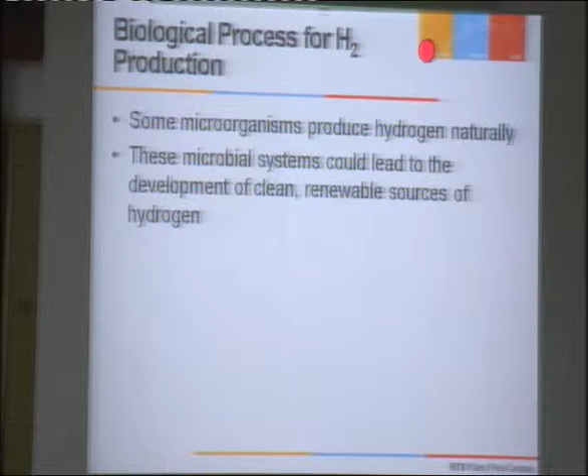You can utilize microorganisms to produce whatever material you want to produce. Here we have different types of microorganisms which can produce hydrogen naturally through natural processes. The only problem with biological hydrogen production is the low yield.

Biological hydrogen production processes are becoming important mainly because they can utilize renewable energy resources. They are usually operated at ambient temperature, while gasification or pyrolysis require high temperature. They require less energy and are less expensive. However, the major constraint to commercialization of these processes is the lower hydrogen yield and lower rate of hydrogen production.

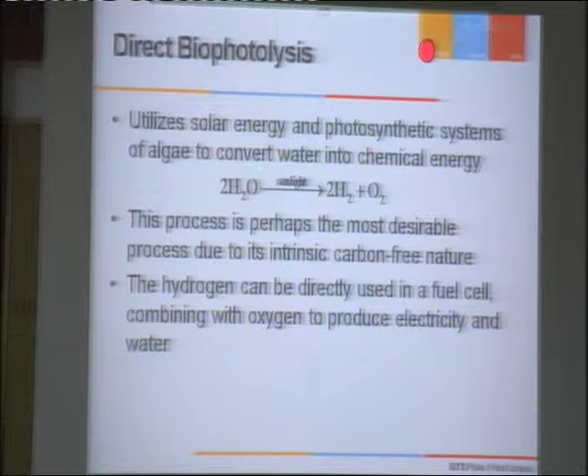So there are 5 processes. In all these processes, there are 2 enzymes which mainly play a role: hydrogenase and nitrogenase enzyme, whether it is direct biophotolysis or indirect biophotolysis.

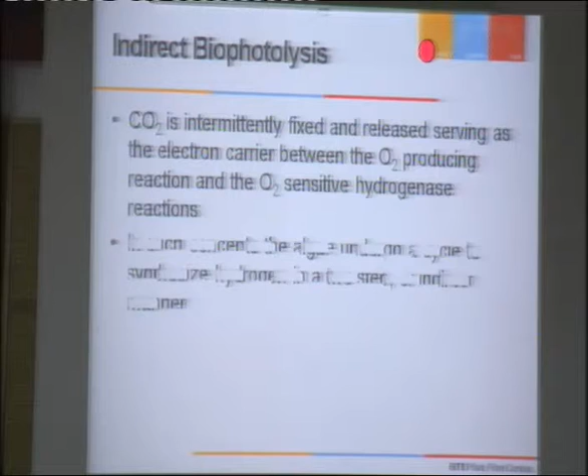In direct biophotolysis, it utilizes solar energy and the photosynthetic system of algae to convert water into chemical energy, so the water is split into hydrogen and oxygen. There is a mechanism where H2O is first converted to 2 hydrogen plus ions and electrons, and then the enzyme utilizes those 2 electrons to combine 2 atoms of hydrogen into the form of hydrogen, H2.

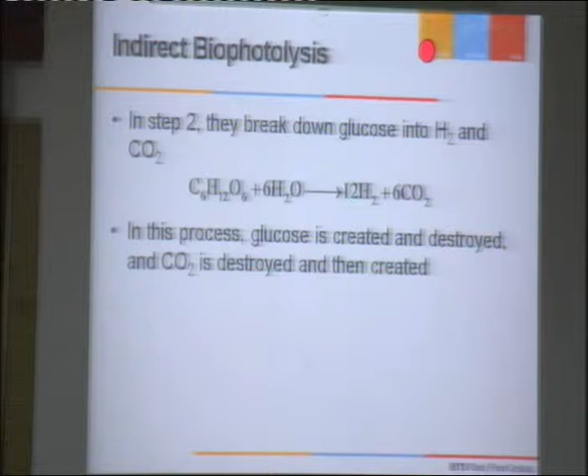Similarly, in indirect biophotolysis, in step 1 the cyanobacteria, again an algae, assemble water and CO2 into glucose and oxygen through a complex process by photosynthesis. So first it forms glucose, and then in a second reaction it is further converted into 12 molecules of hydrogen. So it breaks down.

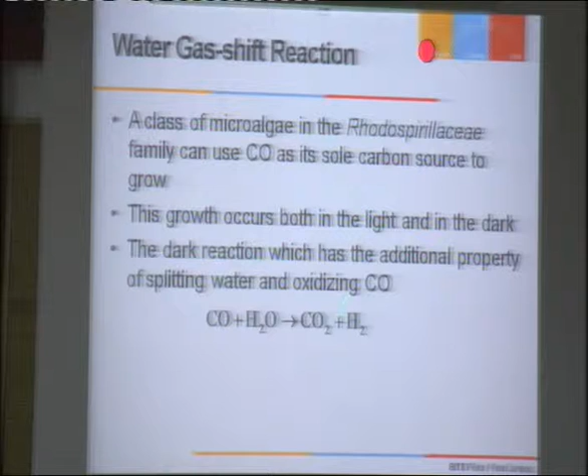Third is the water gas shift reaction. This is based on specific microorganisms that can utilize CO as their sole carbon source to grow, because CO also has carbon, and every species requires a carbon source for growth. This growth occurs both in light and in dark. In the dark reaction, there is the additional property of splitting water and oxidizing CO. So it is further oxidized by the microorganisms, that is CO plus H2O, which produces hydrogen.

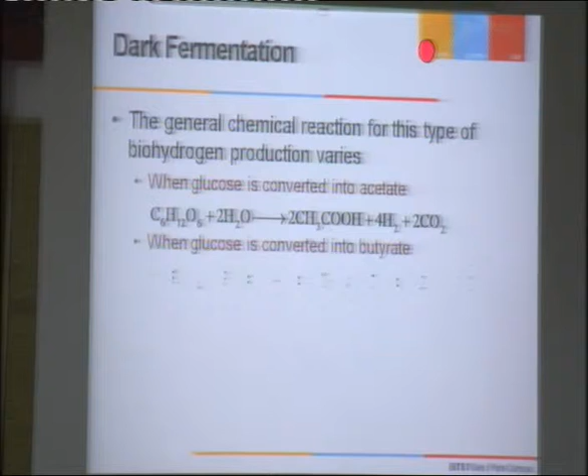In photofermentation and dark fermentation, again a similar reaction occurs, but there are different microbial species responsible for those reactions. So as I mentioned, mostly the mechanism is the same, because of the 2 enzymes present in either the algae or the microorganisms, hydrogenase and nitrogenase, but only the reaction paths are different.

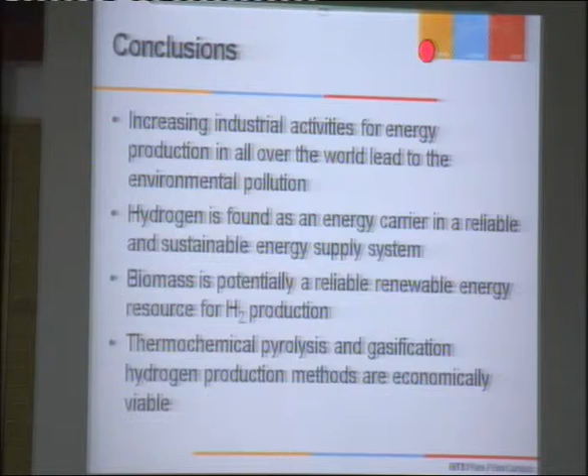So this is what I have, and now I will come directly to the conclusions. The increasing industrial activities for energy production all over the world lead to environmental pollution, as you have seen, there is solid waste. Hydrogen is found to be an energy carrier in a reliable and sustainable energy supply system, and biomass has the potential to be a reliable renewable energy resource for hydrogen production. The thermochemical pyrolysis and gasification hydrogen production methods are economically viable. However, now biological hydrogen production is also being taken up, because everybody is working on environmentally friendly systems. So these are also coming in a big way, and the only problem, which is the low yield, may be sorted out later.

Here are some references. Thank you.

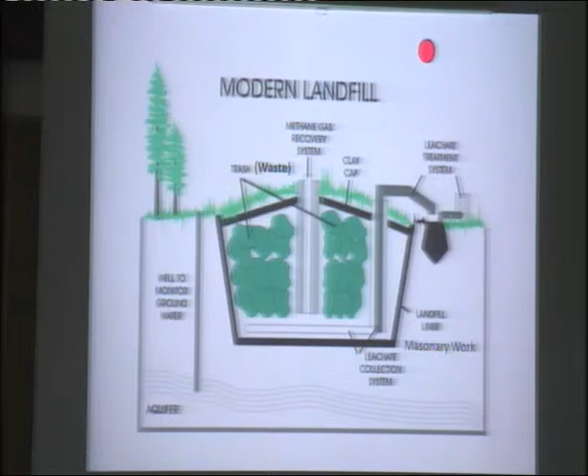The waste, that is trash, is kept in the masonry work inside, and the gas formed is taken out for production of energy, and the leachate is collected and treated, okay. So the disadvantages you have already seen just now, people are not affected by those things.

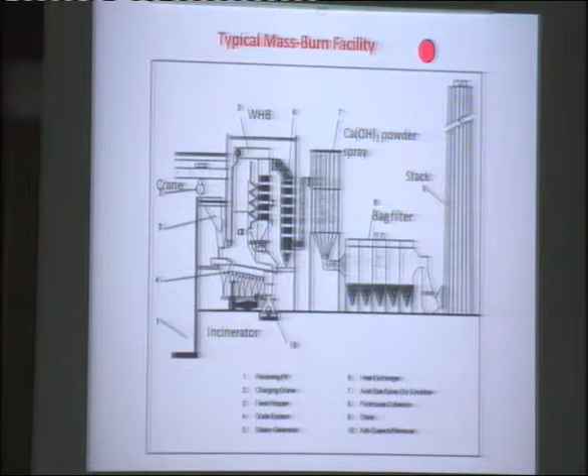Here is a typical mass burning facility. You will have waste which must be dried to the required moisture content, otherwise it's very difficult to burn. You will have a crane to put it into the incinerator. The high temperature gas generated will be utilized for generation of steam, which will be utilized for power production in a steam generator. But when you burn the fuel, you will have a lot of ashes, so the gas is to be treated properly for removal of dust particles before it goes to the atmosphere.

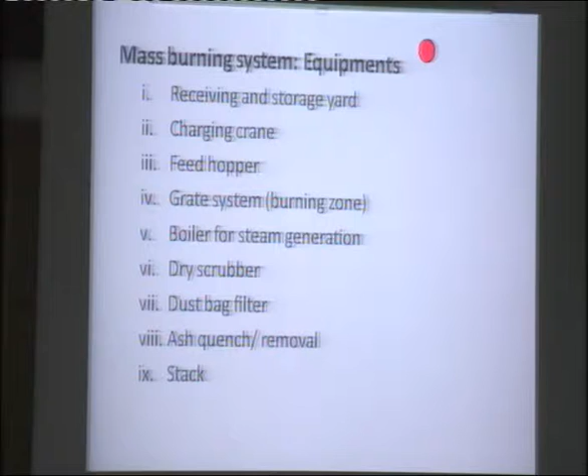That's a typical system, some figures have been taken from reference sources. You will have different equipment in this type of mass burning system: storage yard, charging crane, feed hopper, grate system for burning, boiler for steam generation, scrubber for treating the acid gas, and dust bag filter, ash quench removal. The very high temperature ash cannot be sent for landfilling directly, and the gas needs to go through treatment.

In many cases, you will have refuse derived fuel. When you have municipal waste, it is to be pelletized in the form of pellets. Or when you use gasification or pyrolysis, that will be used for plastic solid waste or tire waste. So I am not going to talk only about kitchen waste or something like that. We should also talk about plastic waste, which can be utilized more economically, and tire waste also.

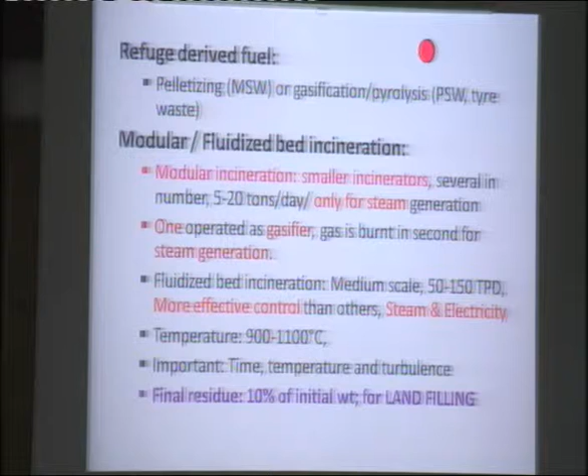It's modular, skid-based incineration. There are many incinerators built in very small units, only 5 to 20 tons per day, used only for steam generation, because that steam it is not economical to produce electricity from. So only steam can be generated. Under that condition, one unit is operated as gasifier. The gas produced is burned for the second, and the steam is produced, and that steam can be utilized for different purposes, which we will come to a little later. It can be utilized in different industries.

As you know, paper and cloth need to be dried using a drum dryer. Steam is fed into the drum, and over the drum, the cloth or paper passes over and gets dried. The temperature is generally 900 to 1100 degrees centigrade, and the residue obtained from these incinerators is generally not more than 10%. This residue is to be sent to landfill.

Benefits derived from incinerators: you can get steam which can be utilized for food processing and drying purposes, for textile, leather, pulp and paper industries also. Electricity can be sent to the local grid. But the concern is the emission of gaseous and particulate pollutants, which is to be cleaned properly, and leaching from contaminated soil and groundwater.

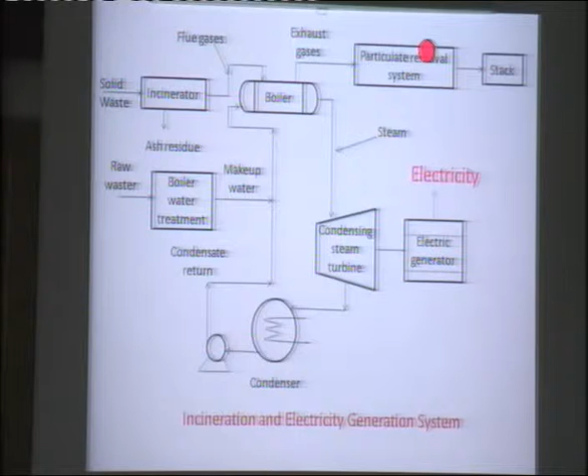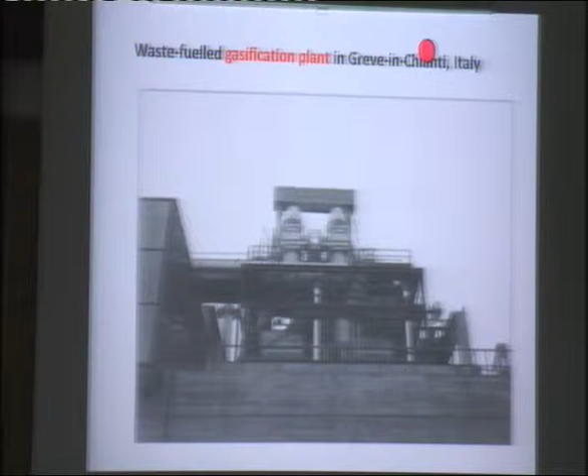This is a typical flow diagram of an incineration and electricity generation system. You will always have a solid waste incinerator. You will get the flue gas, and that flue gas temperature is very high, 900 to 1100 degrees centigrade. That can be used for generation of high pressure steam, which is used for generation of electricity through a steam turbine.

The gas will go to the particulate removal system and then to the stack. You can see this boiler water, which is very costly, does not need any further treatment. It will go directly to the boiler for further steam production, but you need to give always some quantity of make-up water because of losses.

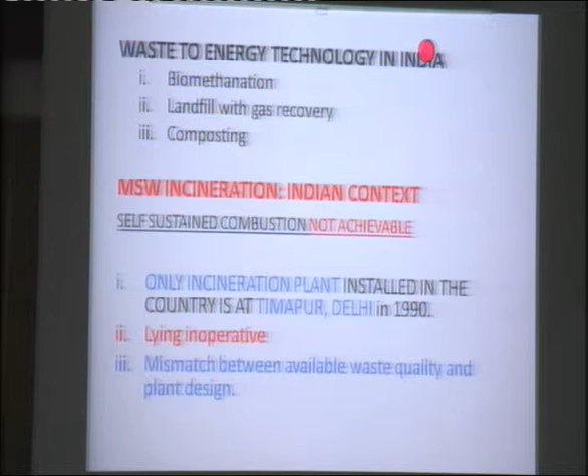Say, a waste-fuelled gasification plant. If you go to such a plant, you cannot see anything from outside, but whatever I told just now in the previous slides, everything will be there inside.

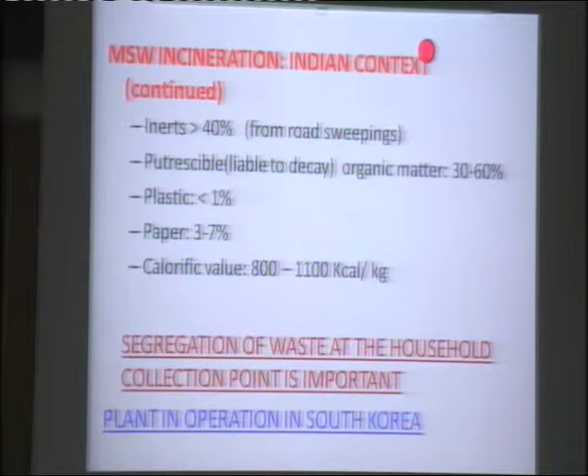Waste to energy technology in India, as I was talking about, generally includes biomethanation, landfill with gas recovery, and composting. These are the practices in India. But for MSW, there is no incineration plant in India because whatever waste is obtained is not self-burning, since it contains a lot of sweepings and such things put into the dustbin, so it contains incombustibles that cannot be burned. There was one plant built in 1990 in Timarpur near Delhi, which is not operating because under the conditions it was built, the company did not get the quality of material, the waste, for burning. It did not burn properly, so it is not running.

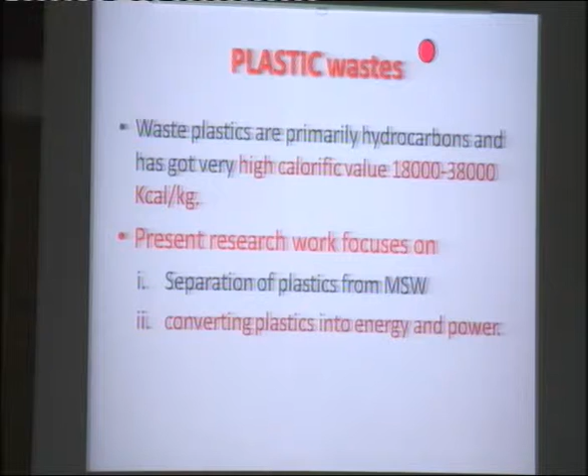In the Indian context, municipal solid waste contains more than 40% inerts, organic matter 30 to 60%, plastics less than 1%, paper 3 to 7%, and calorific value 800 to 1100 kilocalories per kg. Under this condition, this cannot be burned, so that plant is not running. It is very important that segregation of waste at the household collection point must be done, otherwise it will be mixed with non-combustibles and cannot be utilized for generation of power or energy.

Now, there are many plants in operation. For example, a few days back, I was observing a plant in South Korea. They are producing energy.

Now, plastic wastes - plastics can be separated from the municipal waste and we can get energy or power from that. You can see the calorific value is too high, 18,000 to 38,000 kilocalories per kg. Present research work focuses on separation of plastics from municipal solid waste and converting plastics into energy and power.

This energy can be in the form of chemicals. As the previous speaker was talking about, plastics can be converted to different types of chemicals, and that can be utilized as blending of motor fuels.

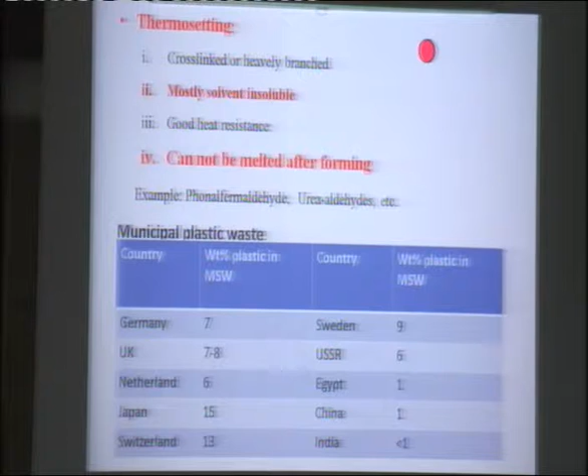Here you can see that 4% of the oil is utilized for production of plastics, and 3 to 4% of energy is utilized for its processing purposes. So around 8% of petroleum is utilized for production of plastics. It will be proper economical if we can convert that plastic back to fuels.

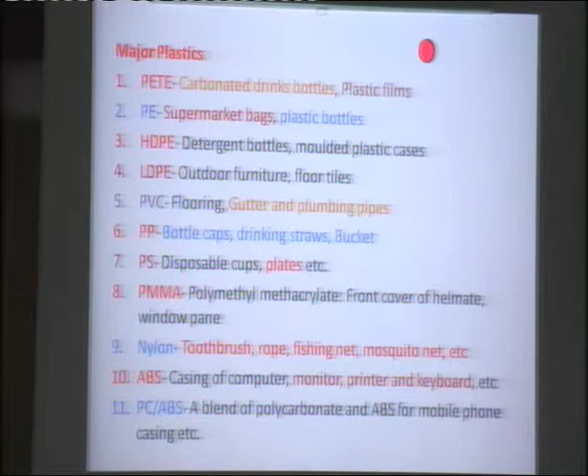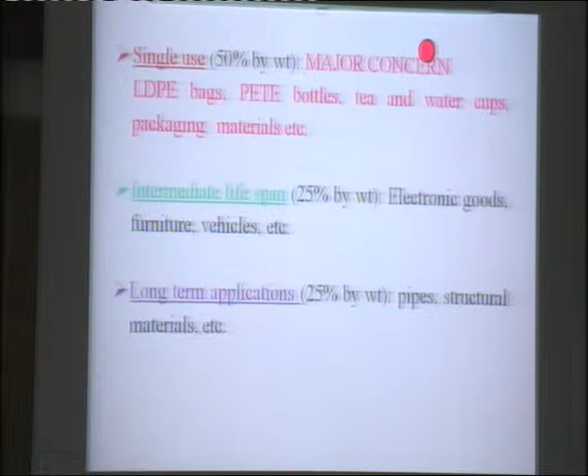Now there are different types of plastics. We have thermoplastics. These thermoplastics can be completely melted and new products can be formed. For example, polyethylene, polypropylene - all these things can be melted or dissolved and reprecipitated, and we can have new products.

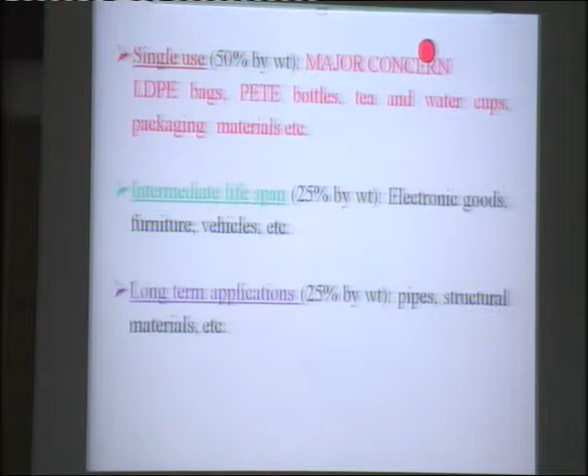But thermosettings - you can see the phenol formaldehyde, urea-aldehydes - you get cups, plates, plastic plates and such things. They cannot be melted and reformed.

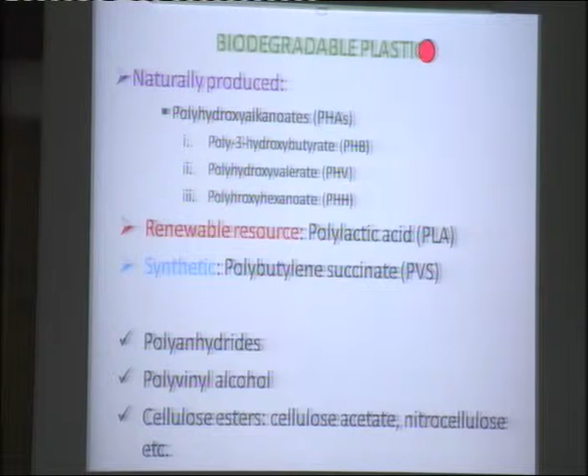But some of these, like nylon 6, contain nitrogen, and PVC contains chlorine. PVC cannot be gasified with polyethylene or polypropylene, because when you treat PVC, you get hydrogen chloride, which is corrosive and gives different types of products that create different types of problems.

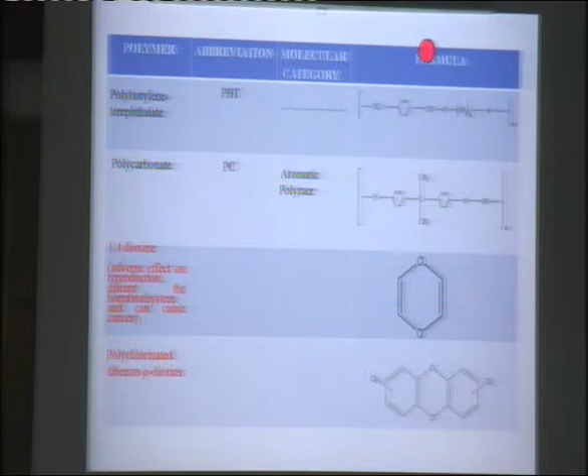So before you go for incineration or gasification, you have to separate these. You see this dioxin - chlorine or oxygen can form dioxin, which is very much toxic and can cause cancer and different types of diseases. So these are to be separated before burning. Open burning is not advisable.

Now you have different types of recycling systems - primary, secondary, tertiary, and quaternary recycling systems. Primary is used in industries - new plastics, small plastic scrap generated during processing can be recycled within the plant itself. That is called primary. In mechanical recycling, you have to separate all the plastics.

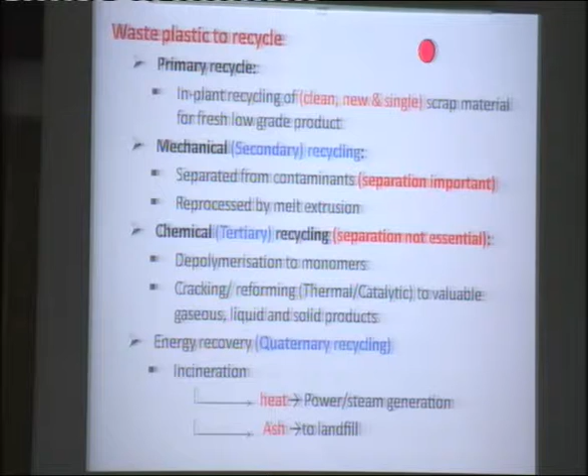Then you can produce different products separately. In tertiary recycling, you need not separate them - you can process them combined, through cracking and reforming, and get different types of fuels. But this separation is very difficult, so mechanical recycling is too costly. Nowadays more stress is being given to tertiary recycling, converting these plastics to chemicals.

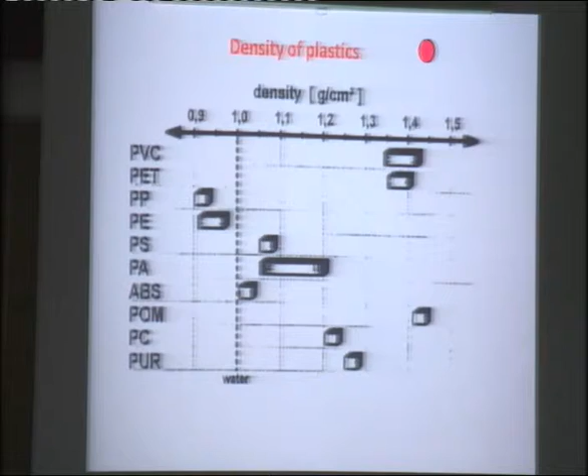Then you have energy recovery through incineration, which is not advisable because of pollution and other problems. Ultimately, you need to go for landfilling the ash, which will create soil, water, and other pollutions. Now you have to understand the different methods of separating plastics.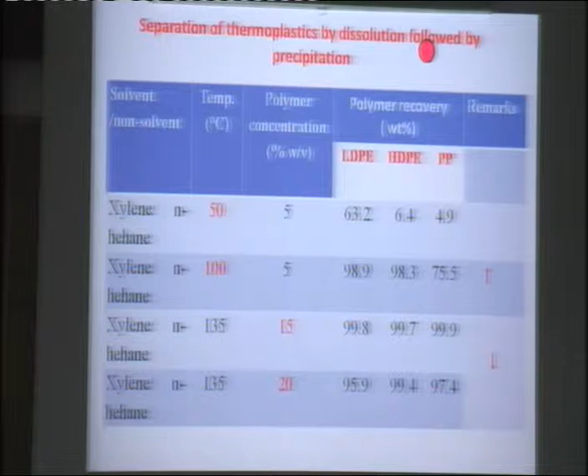You first dissolve, for example polypropylene and polyethylene, in xylene, then put that solution into normal hexane. The polyethylene will separate - it can be separated, dried, and you can again form some other product which is of low cost.

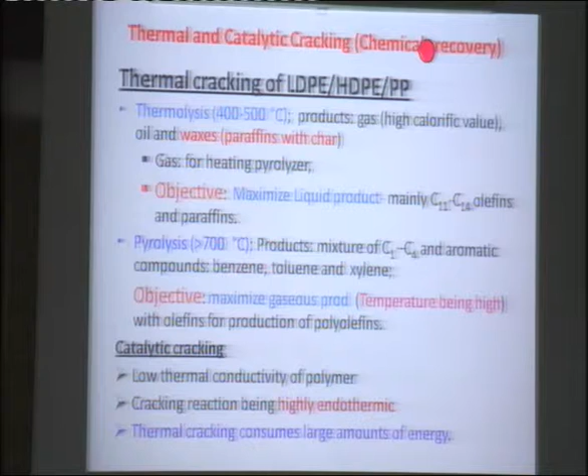As I told, PVC should not be used for incineration along with polyethylene or polypropylene, because it produces hydrogen chloride, which is highly corrosive and forms different types of toxic products.

Now this is thermal cracking. If you crack thermally, either by thermal cracking or catalytic cracking, you will get different types of products - fuels.

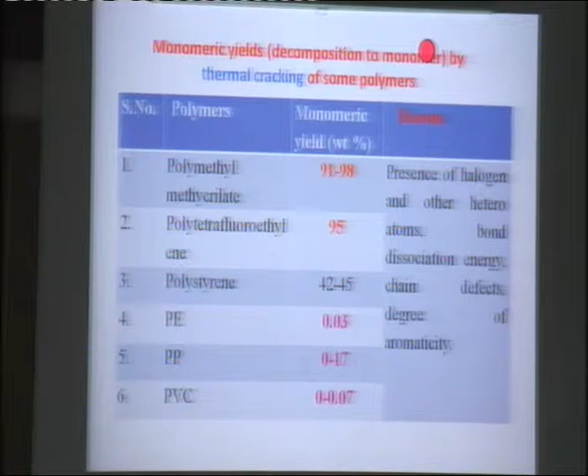But if you use catalyst, you can reduce the temperature gradually, because cracking is always a highly endothermic process. So you want to extract energy from these plastics, but because it is an endothermic process, you need to supply energy for cracking purposes. That is the reason that if you use catalyst, you get several advantages. The cracking will occur at lower temperature, the rate will be high, and you will get the desired product if you use the specific catalyst.

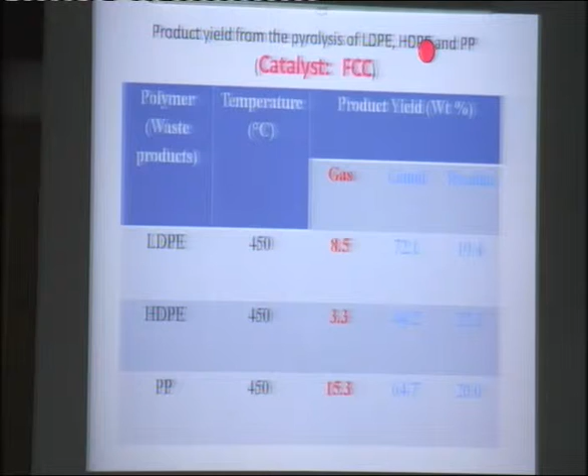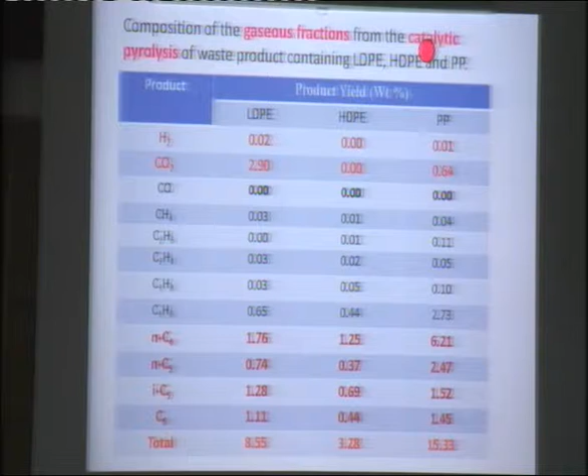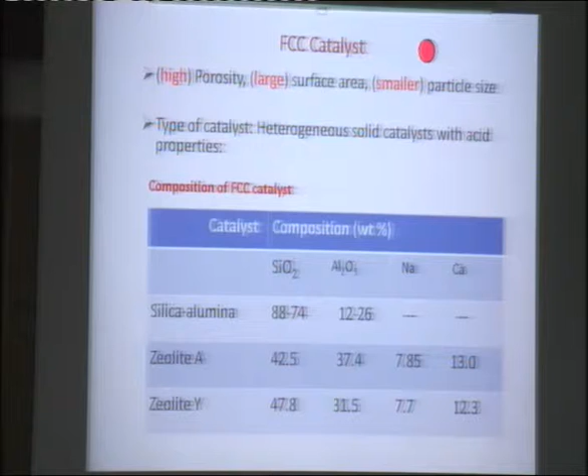These are the things I was talking about. Next, you have monomeric. You can see from here that with thermal cracking, you can crack polymethyl methacrylate 91 to 98%, and the polymer will produce back monomer. But polyethylene and polypropylene will not produce monomer; it will form some other products.

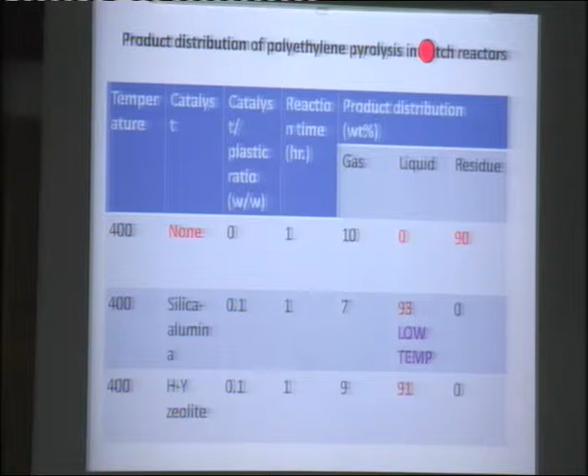Next, here you can see the catalyst is FCC, and you get gas, liquid and residue. Using catalyst, you are getting only 8.5% by weight of gas for LDPE, and 3.3 for another. But if you use higher temperature, this is at 450 degrees centigrade, you will get more gas and less liquid. So this is the percentage of gas you get, and what gases have been shown here. This is C4, C5, C6, and these are the things you get with FCC catalyst.

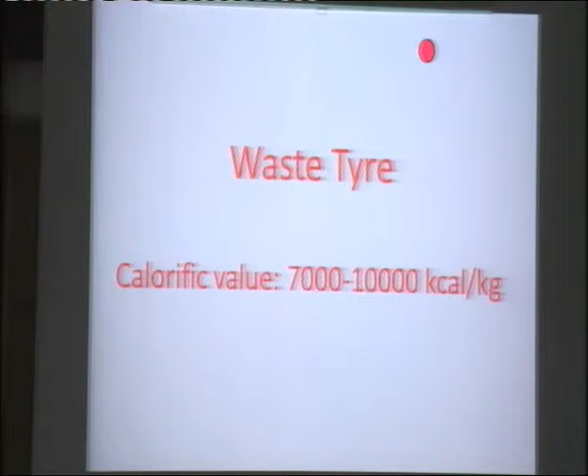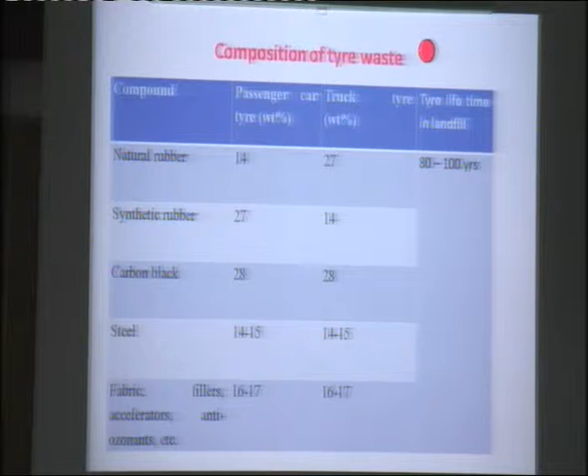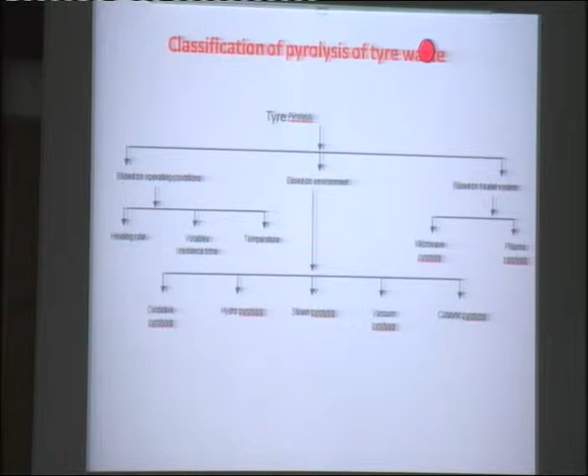Now you can see the calorific value of waste tires. This waste tire is much more, 7,000 to 10,000 kilocalorie per kg, so that can be utilized for generation of heat and power. You have natural rubber, synthetic rubber percentages, steel, carbon black, and all these things utilized for production of tires, and they can be burned to produce different chemicals and energy.

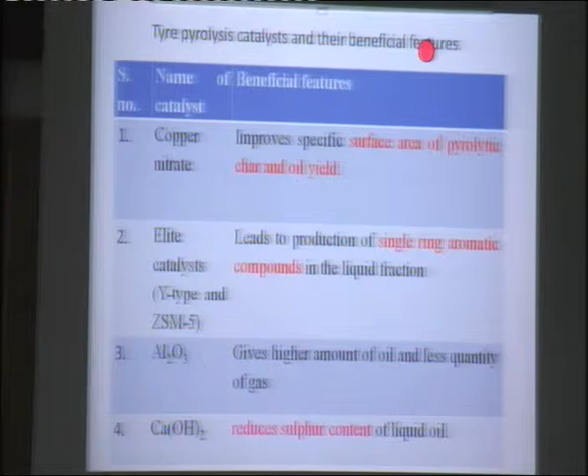These are the classifications of tire pyrolysis based on different operating conditions and environment, that is reaction environment and the heating system.

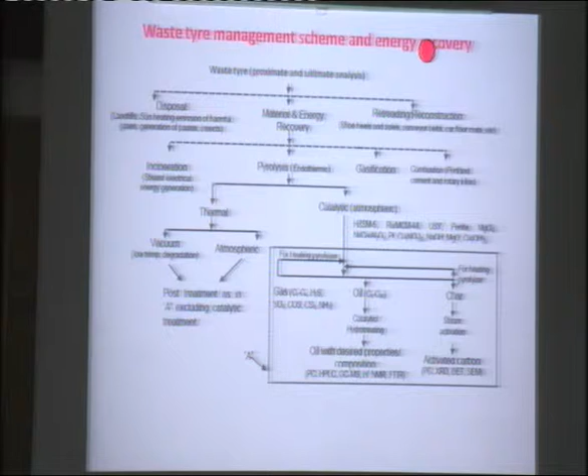You have pyrolysis reactors, different types of pyrolysis. You can see vacuum pyrolysis, shorter residence time reduces undesirable heat. More time you keep the gas inside, the polymers will break down molecules more. So you need to reduce the residence time as much as possible. The pyrolysis oil is higher at lower operation temperature; at higher temperature you get less oil and more gas. Aromatics in pyrolysis oil increase concentration. If you use vacuum pyrolysis, you get more aromatics, which are utilized for gasoline purposes.

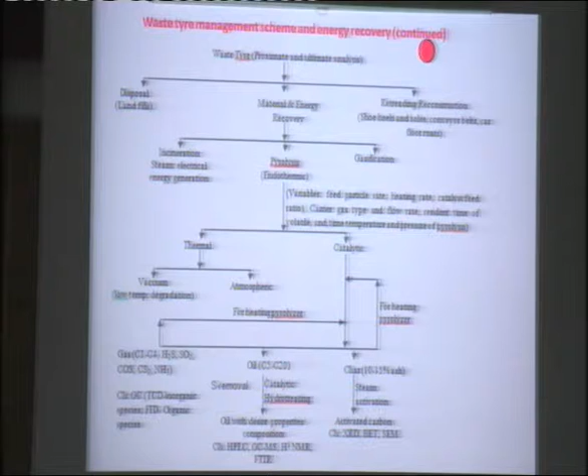Fluidized bed reactor, are you familiar with all these tools? You have seen popcorn, whatever - fluidized bed works like that, with uniform temperature inside everywhere. But in a fixed bed, you get different temperature and lots of problems.

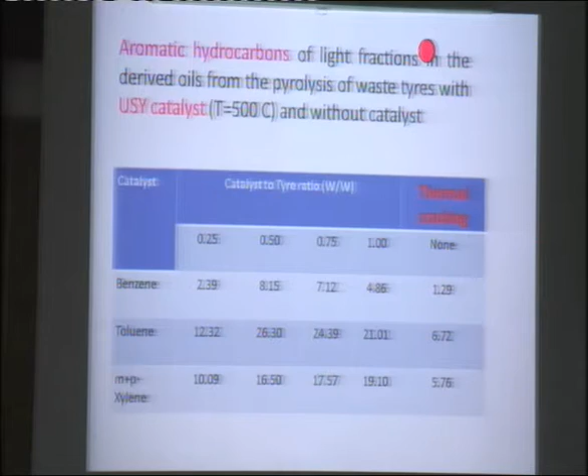Flash pyrolysis, plasma reactors, lots of things - autoclave, fixed bed, rotating reactors. You get different types of catalysts and different advantages, single ring aromatic compounds, sulfur content. You can see calcium hydroxide goes as calcium sulfide and all sorts of things; it goes in the char. So in the liquid or product, you will get less sulfur; more sulfur will go to the char.

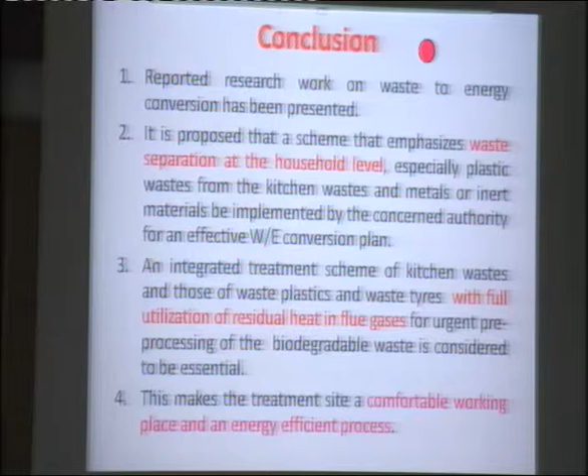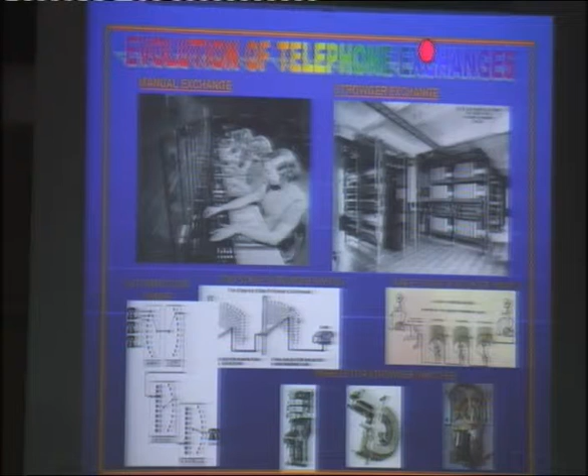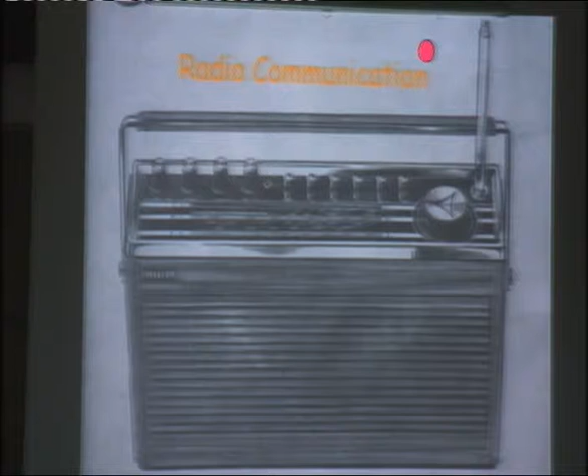And through that, the first telegram came into being. These are basically for military use. Everything in communication was earlier developed for military use.

Then came telephone. How come telephone came into being? They put another wire in place of one, and telephone came into being through Alexander Graham Bell.

So first thing you use is hello. When you pick up the phone you say hello. Who was Hello? You know that? Everybody is knowing this. Communication is pakka, right?

And these were the exchanges. First there were manual exchanges, then strowger exchanges, then automatic exchanges. Now we have got electronic exchanges. Now we have got IP-based exchanges. So things keep on changing.

Now we are into this world, where so big an antenna is there, satellite communication. And in the meanwhile, while telephony and telegraphy was being developed, radio systems were also being developed commercially. There is an old radio, which is now being used for Mann Ki Baat by Modi.

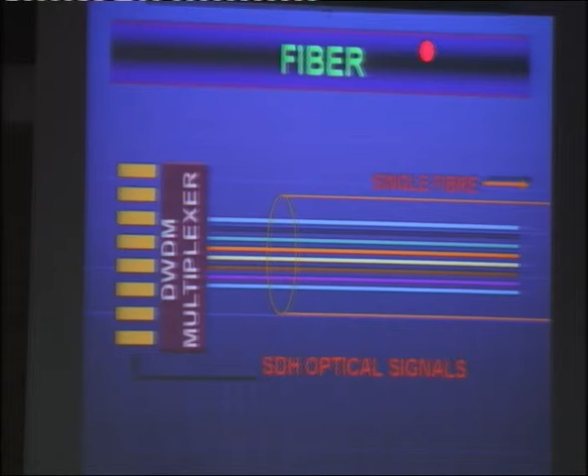So now we are into the world where optical fiber is ruling the roost. So with common telephone wires, now we have switched on to optical communication, where light is being used for communicating from one place to another at very large bandwidth and very high speed, because it's light, so it's going with the speed of the light.

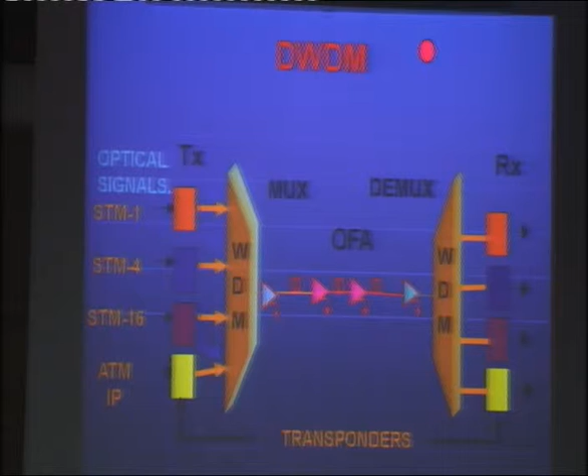For that we have dense wavelength division multiplexing system, we call DWDM. We modify the color of light, means the frequency of light, so we get higher bandwidth and all the requirements, but we need electronic measures, mux, demux - mux means multiplexers and demultiplexers, and all these type of systems are there. Then we are getting the system.

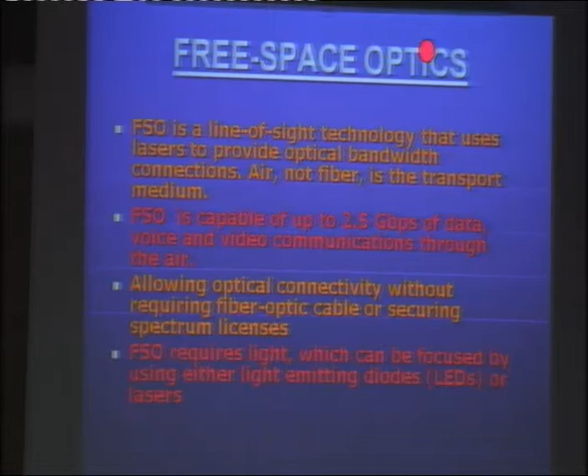I am not going into technical details because that will become boring and time consuming both. And we do have broadband passive optical networks, so we don't need to give them power at either side. At one side power is given and other side it is received, so it is a passive system. Something like this will be there for covering the house through a beacon.

Then there are Ethernet passive optical networks. This is for point-to-point and point-to-multipoint connectivities, and this is how the optical systems are being connected to the houses. I am telling you fast the new technologies which are in vogue. We are already having it at your home - maybe you are having broadband through optical fiber.

Then the bigger part came, free space optics. Everything should be open. Your communication should be from one chat to other chat to chat. That is free space optics, and it can be used through such type of transmitters and receivers. We are putting it at the top.

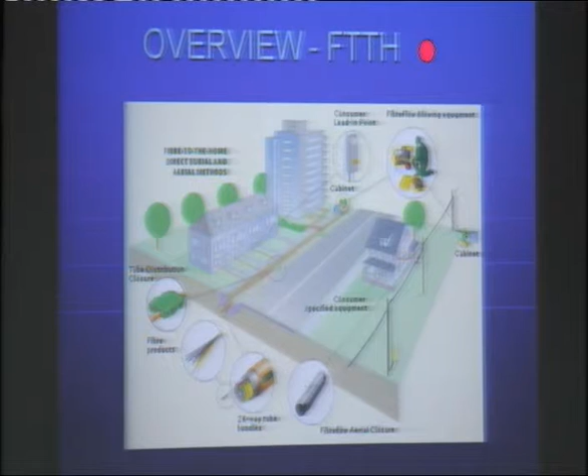Then as we were discussing, fiber to the home, FTTH. This technology has already come in, and broadband systems are working on it, and this is a very stable and theoretically infinite system. It can go up to infinite bandwidth.

Then this is the same thing. And still further, what do we have? We have ATM PONs, gigabit PONs, hybrid fiber coaxial systems, ultra high DWDM, coarse DWDM. All these types of things are going to come. And presently, what we are having is ISDN network also. These are also there, which are very good at, say, data transfer, high speed, fax, digital phone, and everything can be connected to one telephone.

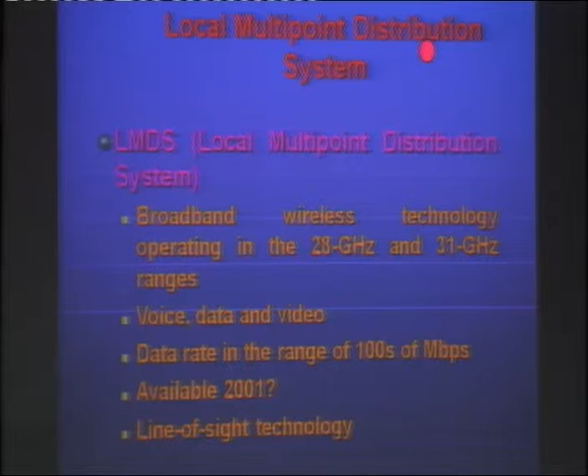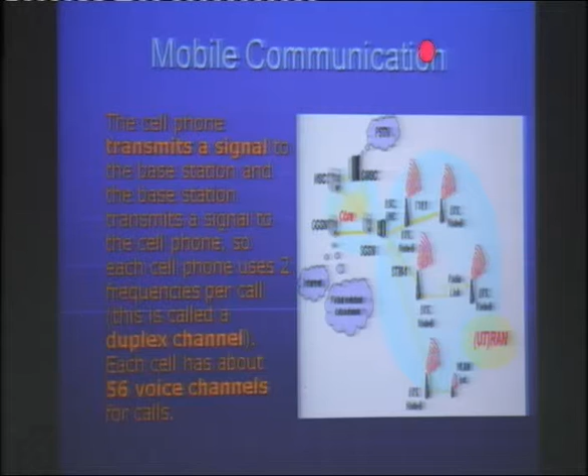Then we have virtual private networks, a network of network elements which are in a group, and they are creating virtually a private network. There is no interference of other networks, and they have fixed and faster bandwidth. For point-to-point connectivity, we are having MLLN systems and MPLS VPN systems.

And this is something you do understand - it's a Wi-Fi LAN or the Wi-Fi system.

Wi-Fi wo hai, which is being given by Kejriwal free of cost. Do you remember? He has won the election on this dhoka. Nothing is free in this world. There are no free lunches. You have to do something, then only you will get something.

So for metro access, we can plan and work out Wi-Fi networks, which we are into that system. And for last mile broadband, WiMAX systems have also come in. I am running a little faster because I have been directed by a madam that time is short and you are getting bored. LMDS systems are also coming in for backhaul hotspots and for video accesses. We can have them. These are all presently in.

This is the present trend. Mobile communication - you very well know how mobile works, but you don't know how you're reaching 4G. Let me tell you about 3G, 2G, 1G. Everybody knows there was no 1G originally. 2G came directly, and whatever was before 2G got called 1G. So it was just normal telephone.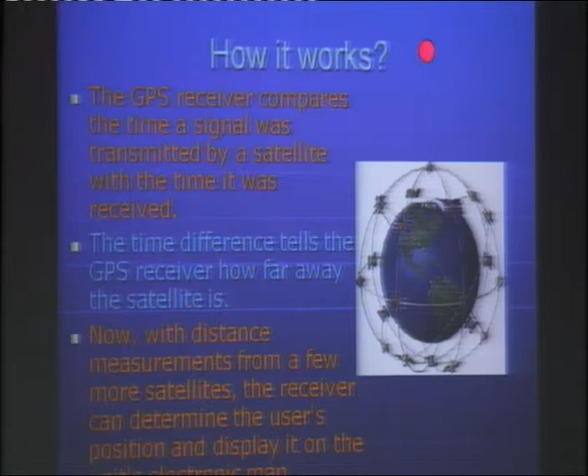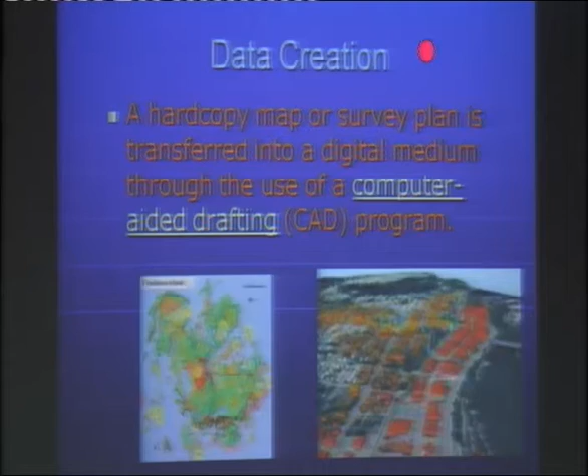GPS everybody knows these days, so I'm not going into detail of that. How it works - just one thing, it should be visible from some satellites. Nowadays at least 4 satellites should be visible, then only we can get a GPS location. GPS receivers are everywhere now - even my car has GPS.

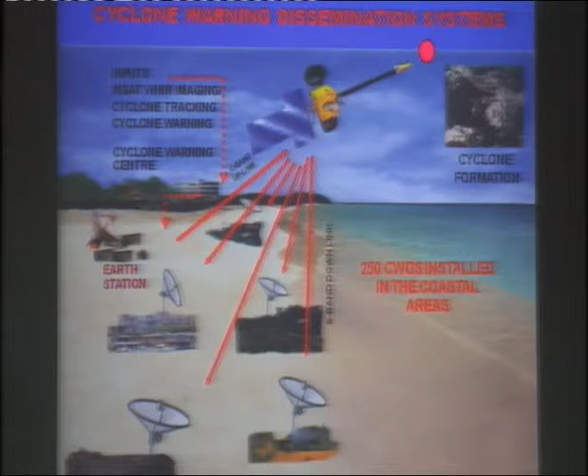It was used for data creation, data capturing - these are the usages. The first major use was for disaster mitigation. The best part of this communication is that nowadays we can predict storms and what further is coming. I'm not going into detail on that.

Cloud services are coming, 4G mobile - you people very well know. Then OTT, over the top - it's different from OST. That's something that comes up when teaching simultaneously, that's understood as overhead transmission, OST. This is not OST, it is OTT.

Then your mobile will be used as a remote. It's coming with IPv6. Smart cities - you people very well know. Jaipur is being made a smart city. What is a smart city? We'll discuss that some other time - I already have a presentation for that. And our own Modi's Digital India.

In Digital India, we presume that our world will be transformed. So, wait till then.

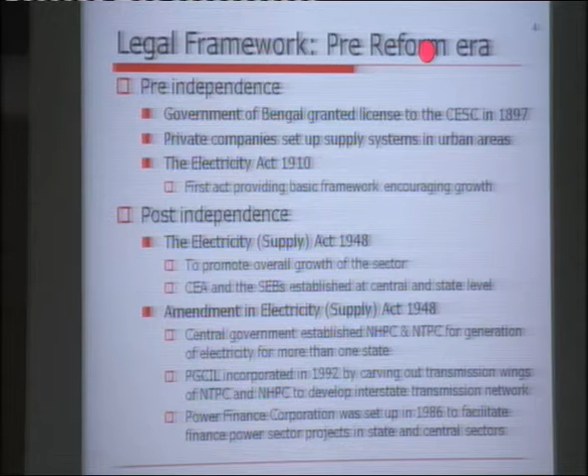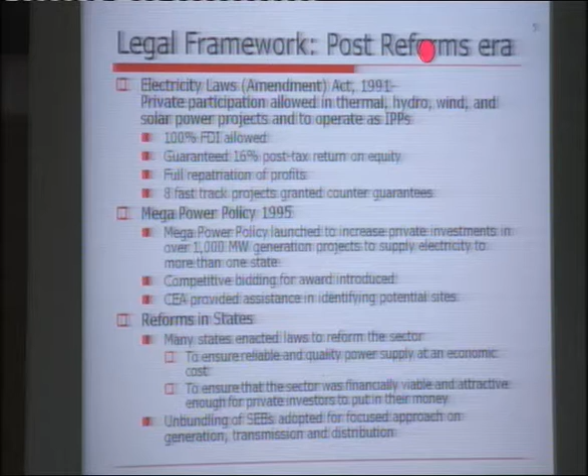In Rajasthan, Bikaner was the first Indian state to introduce electricity, in 1886. Initially in Rajasthan, power was confined to 42 towns and the total capacity available was nearly 13.27 megawatts, which now, I think at present, is around 15,000 megawatts in Rajasthan. The total demand over Rajasthan is around 10,500 megawatts instantaneous.

RSEB was formed in 1957, which after reform and unbundling was divided into 5 companies. One is Vidyut Prasaran Nigam, RRVPNL, in which I am working. One is the generating company, RVUNL, and three DISCOMs, the distribution companies.

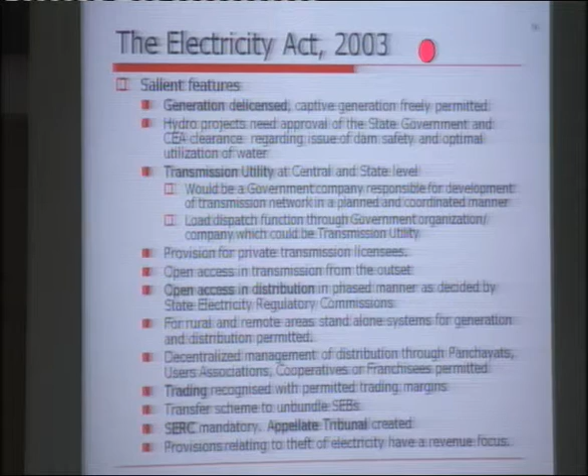These are the legal framework of the pre-reform era. The Electricity Supply Act came in 1948, and was again amended in 1948. Again, the electricity law was amended in 1991. Private participation was allowed, and a Mega Power Policy came in 1995. Basically, these were made to develop the power sector for attracting the private sector for production.

After reform or unbundling of State Electricity Board of Rajasthan, one is the transmission company, RVPN, one is the generating company, and for distribution, Rajasthan is divided into 3 parts: Jaipur, Ajmer and Jodhpur.

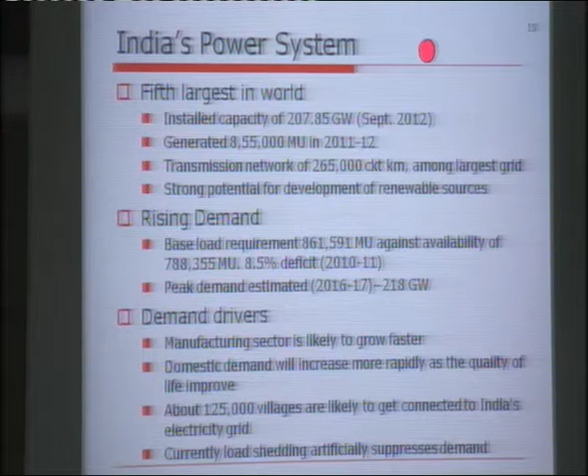Provision of private transmission licenses was made, open access in transmission from the outset, and open access in distribution is also allowed, and the trading and appellate tribunal are also created.

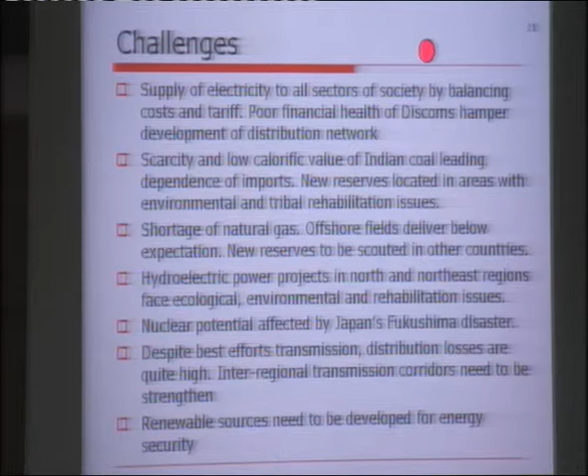These are the challenges. Thank you.